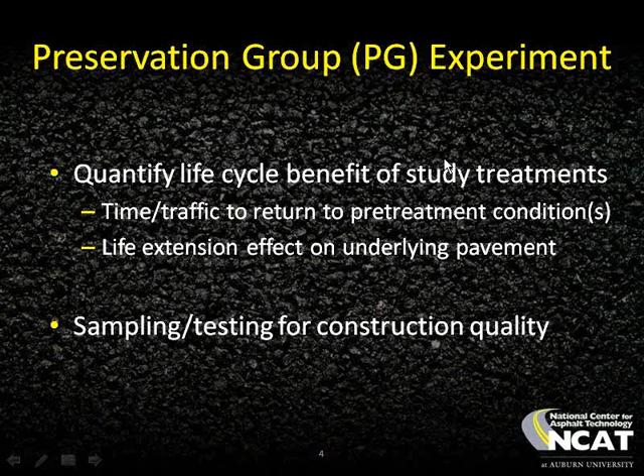Well, the execution of this study kind of breaks down as you see in this slide. The first step for the PG study on the 2012 track is traffic continuation on select group experiment sections from 2009. That's going to be an important feature of the study because it provides us with a starting point for treatments that are applied on the track, but also because it's going to allow us to fulfill our fatigue life expectations that we have on those test sections.

So you've seen the bar graphs that we presented in the past that relate our multi-strain laboratory test results to measured strains on the track, and we're going to continue traffic on those sections in order to see what kind of fatigue life we actually get so we can hopefully validate those expectations. The plan is to stop traffic on these sections when we hit trigger levels of distresses. And I'll talk more about trigger levels later in the meeting, because a trigger can be either cracking or roughness increases.

And I've got feedback from a couple of the states already about what they want to see as the actual trigger mechanism. But when we get to that point, we will apply consensus treatments to those test sections on the track. Of course, the state DOTs that are paying for the experiment will make the final decision about what treatments we'll apply on the track and what the trigger mechanisms will be before we apply them.

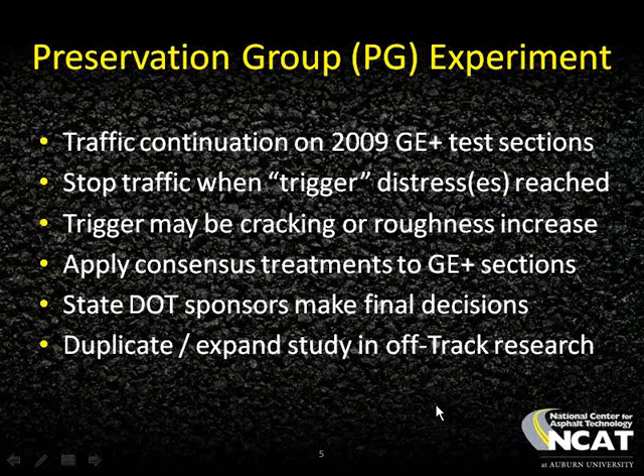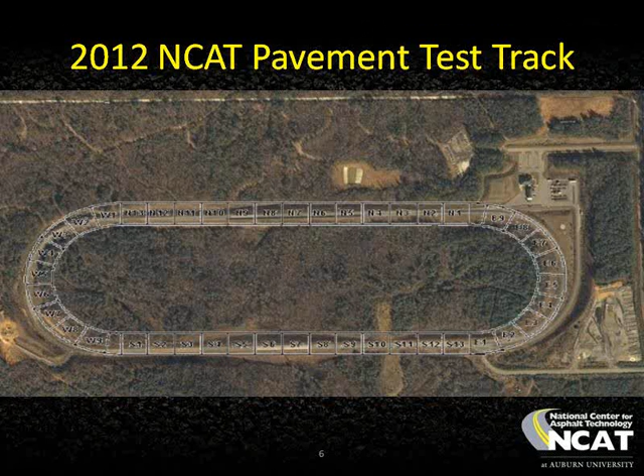So this is the layout for the 2012 track. Of course, we've got 46 test sections on the track, and I wanted to start out by providing you with an update on what this research cycle is going to look like. What you see shaded in color here on this slide, the red sections are new structural test sections. Those will be instrumented for high-speed response.

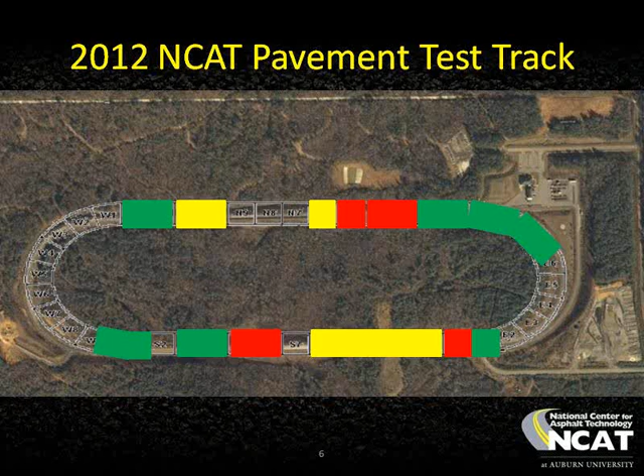Then we've got the green sections that are mill and inlay test sections. And finally, the yellow test sections represent potential sections that can be involved in this preservation group experiment. So I'm going to focus on the yellow sections here for a little bit. I've recolored them on this slide because in my mind, I grouped these into three classes.

What you see highlighted in yellow on this slide is an OGFC section. What you see in red are dense graded mixes with virgin materials. And what you see in green are dense graded mixes with high RAP content design and construction. The thickness on all of these test sections is 7 inches.

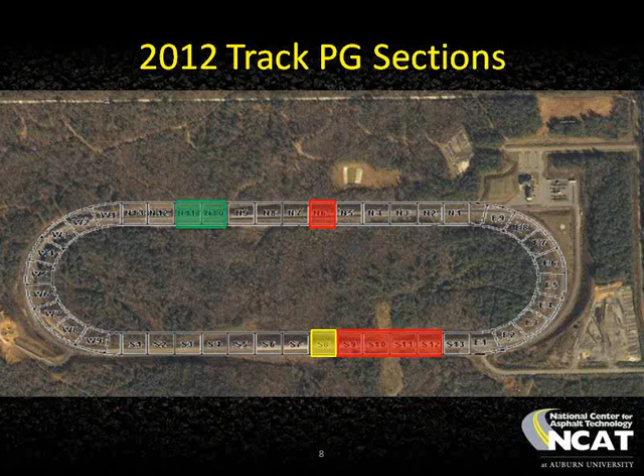So, in those 3 different classes, the recommendation for the treatments that we put in those sections is in consideration of what we've used to build them. All these sections were built as part of the 2009 research cycle. So we've got proactive and reactive treatments to apply on the track.

In terms of proactive treatments, this summer during track reconstruction, we would recommend that we apply a rejuvenating fog seal on that yellow OGFC section. When we do that, we would probably apply the treatment to half of the section and leave the other half untreated just to see what effect it has on performance.

We've got two different sets of reactive countermeasures, and the first reactive countermeasure is as soon as we get to the trigger mechanism. I've got cracking with a question mark by it because I've got feedback from 2 of the state DOTs that said they want cracking to be the trigger mechanism, as opposed to increases in roughness or increases in variability in strain measurements that might precede cracking, because the feedback I got from them was, on our networks, we only respond when we see distresses, so we want to see distresses on the track.

So that's why I put that in there with a question mark, just so that we can talk about it here in this meeting to get feedback from all of you. But with each of those first reaction countermeasures, the idea is to maintain some length of untreated control.

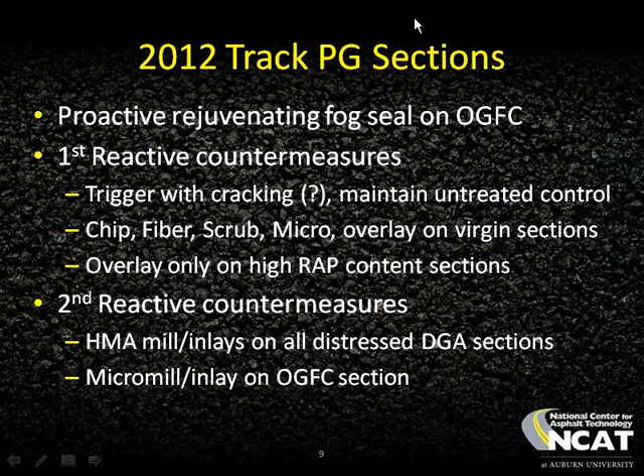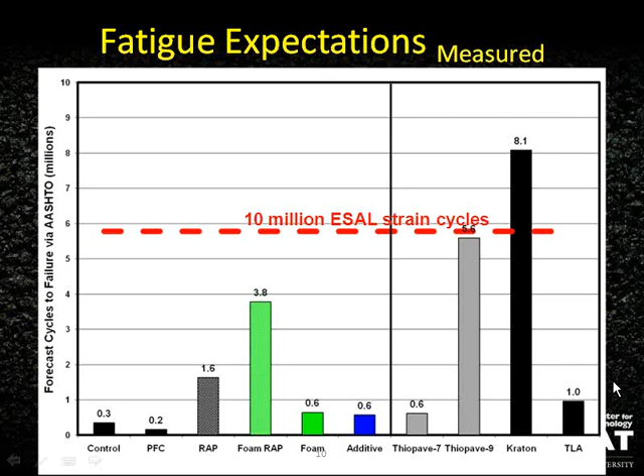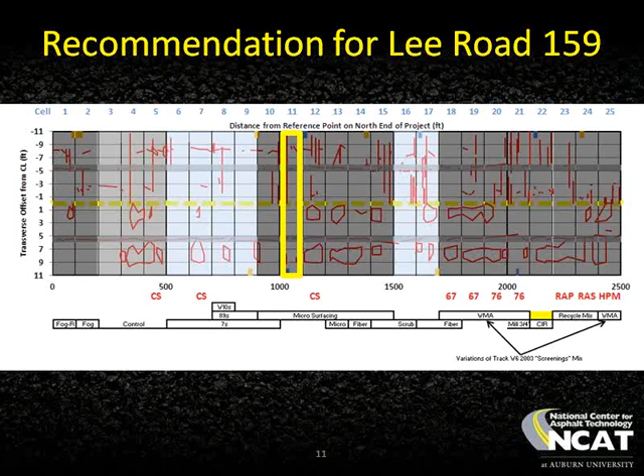So, as I said, what I want to do here is focus on one of these cells, and the one that I randomly picked was from 1,000 to 1,100 feet. And I want to zoom in on this a little bit because looking at the map on this scale can be misleading. So when I zoom in on that cell from 1,000 to 1,100 feet and stretch the distresses out, it's a little more obvious that we have a lot of longitudinal cracking, as I said, very consistently from 5 to 6 feet. So we're not going to map that. We're going to monitor it, but it will not be part of the distress record for the sections.

But even though these cells are only 100 feet long, because we're doing inbound and outbound, and because we're separating between the inner wheel path and the outer wheel path, we actually have 40 5-foot wide by 10-foot long subcells that we will independently be monitoring the recurrence of distresses in. So keep in mind, with each of the treatments, with the distresses in place that vary by cell, we want to see how long it takes to return to pretreatment conditions.

So we don't have any plans. We will not be comparing one cell to another cell. We're monitoring the independent condition as it changes in each cell, and in fact in each of the 40 subcells that make up each cell. So we're going to be collecting a lot of data with this effort and differentiating that data to monitor the reflection of all these distresses.

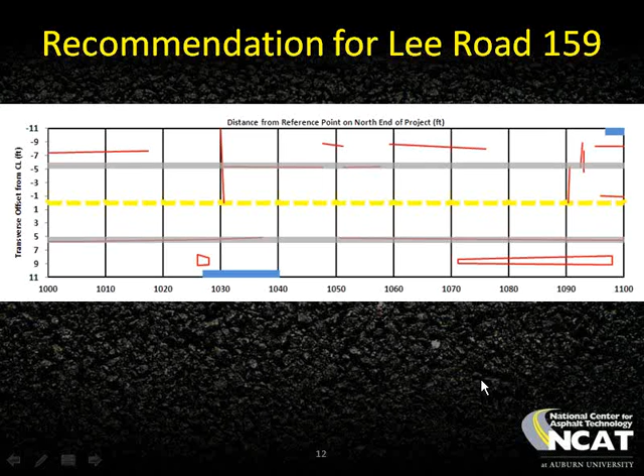So we think we're going to get really good feedback in terms of performance from prevention and rehabilitation on this road, proaction versus reaction, which is providing the state DOTs with what they need to do network level type work when they might be behind the 8 ball and just trying to make the best of the resources that they have at hand, and also to provide data for agencies that are ahead of the curve and using these technologies really the way they were intended for asset preservation.

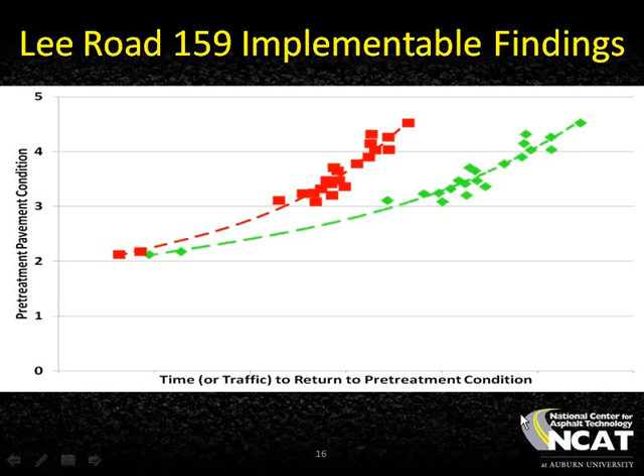So that was the last slide that I had in terms of guiding the talking points that we would have in this meeting, and we need feedback from everybody on several very important issues. Let's see, I got another question.

We do have IRI data before treatments that we've used for planning purposes. We'll have more IRI data. We'll do a set of crack maps, full set of distress characterization right before the treatments are applied, and we're gonna try to do weekly performance data collection out on 159. That's going to be our plan going into it, and because we're using mobile methods, network level methods, we think we'll be able to stick to that plan. But we do weekly data collection on the track, and we hope to do weekly collection out on 159 to get the highest resolution view possible of the data.

Well, we need feedback from everybody by my notes on the following issues. We need feedback on the trigger mechanisms, feedback on the aggregate sources, feedback on the emulsion grades, and feedback on the installers that we would use. And all of this is underneath the bigger feedback we need on the concept of the experiment. If you feel like there's something else that needs to be included, or if you feel like we've gotten off on a tangent with this and we need to pull it back around, again, we need that feedback from you because this is your experiment. Now, I got another question.

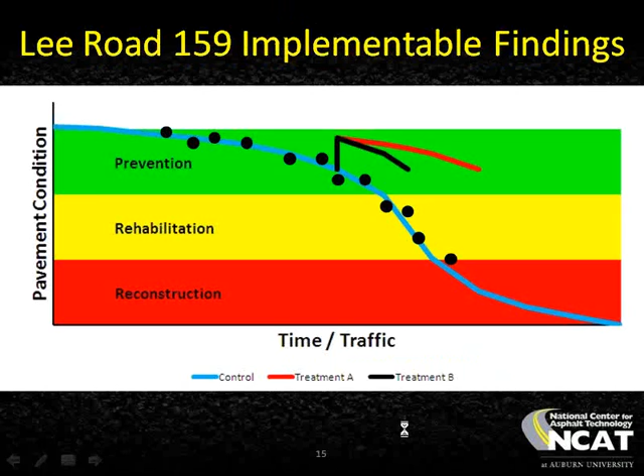Hey, Buzz, it's Mark. Hey, Mark. Can you go back to the slide where it started with, it had the 3 categories of treatments we were going to do following these triggers? Started with the proactive rejuvenating seal and then the 2 reactive measures. Yeah, let me get back to that. Is that what you're looking for?

Perfect. What I was thinking of is, this is my opinion, just for the 3 categories, we would have 3 different levels of triggers. And that would define, obviously, the proactive rejuvenating, no cracking at all, would be the lowest distressed, and then increasingly distressed with the second and the third. Do you guys at NCAT have kind of a seed value of what you think would be a good trigger, as far as the amount or level of cracking or texture or any of those things?

Well, typically on the track, Mark, when we start to see cracking, at least in the past, it has developed pretty quickly. So when we see more than so many feet of cracking within a test section, or some crack density within a test section, once we hit triggers, the magnitude of cracking is not so consequential, because when it starts, it typically progresses pretty quickly. So we're going to need to mobilize and apply the treatments within a very short period of time, and that's been something that we've been concerned about trying to cost out and plan for the logistics that would be required to support it.